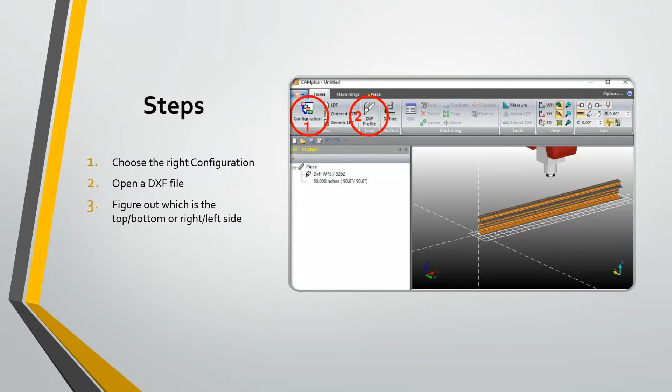First, I want to go through the steps. First, you would choose the right configuration, circled in red and labeled as step 1. Next, you will open a DXF file, circled in red and labeled as step 2. Then you will figure out which is the top or bottom if it's vertical, or right or left if it's horizontal. I will go over an example next.

So now we're going to do an example. Step number 1 is to configure what machine you want to build this in. For this example, we're going to say Quadra.

Next is to bring in the DXF file. So you're going to go up here and click on DXF profile. Now the part that we're going to work with is W75-5262, so it's going to be in the W75 family. So we go to W75, and now here we're going to put the 5262.

Now we need to make sure we create the LDT in the correct place, so we need to figure out which is the top and which is the bottom. One trick that I like to do is bring in the actual fab, but in CAD. Bring in this piece, 5262. We have to create the chicken head notch.

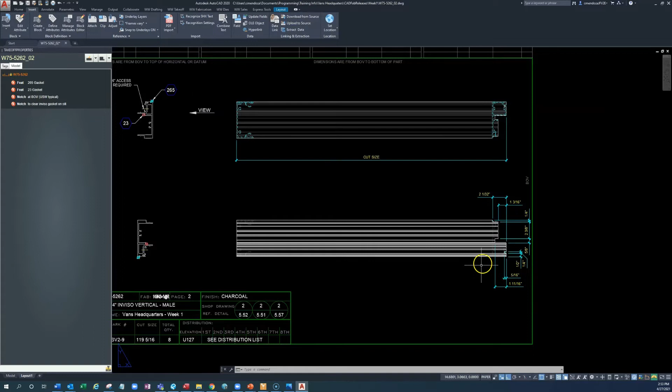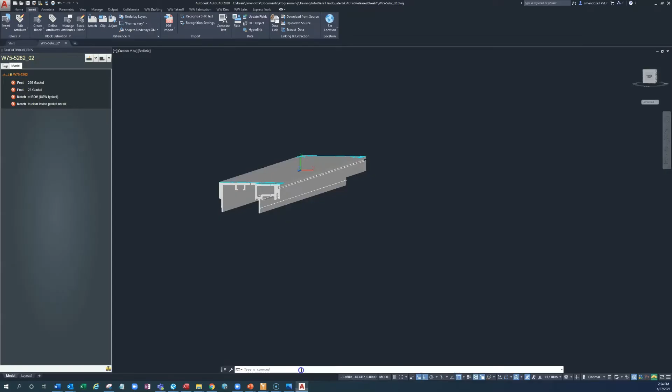So what I like to do is go into model space. You can orientate this piece the same way that you have it orientated in CAMplus. As you can see on CAMplus, it's orientated this way. So if we go back to our CAD file, we see it's orientated the same way.

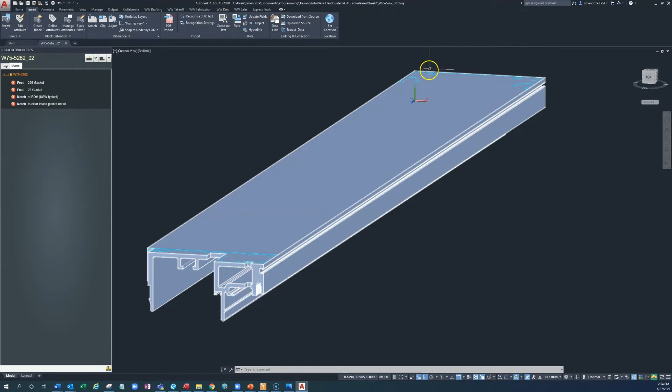Now we can see what's the top and what's the bottom according to the notches. So if I rotate this, you see that the bottom is down here because it has the chicken head notch, and the top is up here. So if we go back to our CAMplus, we know that this is the bottom and this is the top. So we need to build the LDT on this side and not on this side.

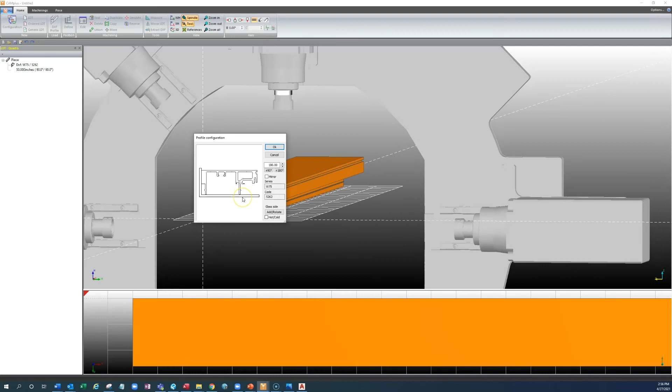Now you can change the way that this part is orientated in CAMplus, but if you want to do that, please contact Tony. The way you do that is you go up here and click on define. Doing so will open up this window, and as you can see, the orientation of the part is currently like this, but you can change it. If you change it here, the LDTs that were already built in the other orientation are going to be incorrect. So if you want to do this, please contact Tony.

And that's how to import and orientate an extrusion in CAMplus. Thank you for joining me. Goodbye.